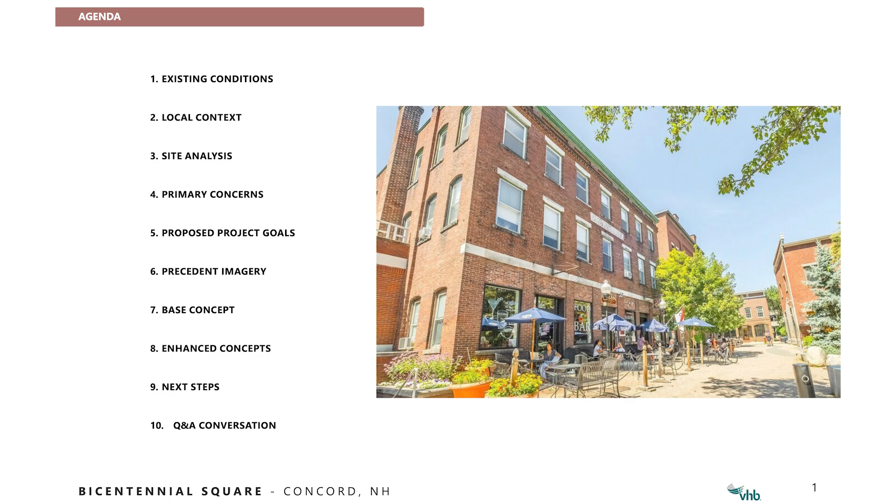We'll go over the 3 concepts we have speckled throughout the room. We have a base concept, which is more of our basic approach with more minimalistic impact to the square. Then we have the 2 enhanced design options off to the right here. Beth will follow up with next steps in this process, and we'll get into more Q&A comments.

So just a little bit about the history. Some of you may know a lot about this, but looking all the way back pre-1976, the square was primarily used for automobile use, not so much geared towards pedestrians, with service vehicles and so forth servicing the businesses all around the edges of the square.

Then come 1976, that's when the first original design came about, incorporating the fountain, the stairwell in the middle of the plaza, and some of the outcroppings. Then in 2006 there was another update to the design, where our artistic sculpture came into play, along with a lot of other different elements like rock formations, plantings, granite, the artistic granite turtle, and some other granite play tables.

So these are enhancements that have happened over a period of time, and it's something we want to recognize - that historical aspect, along with how the storytelling currently happens with this river trail path motif that cuts through the plaza. We want to take all these elements, recognize them, and see how they can be incorporated in the future. We'll get into that in a minute.

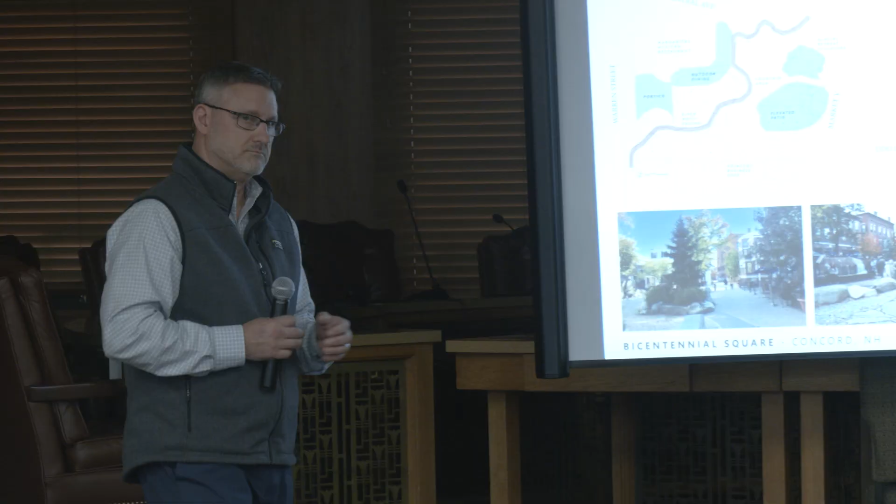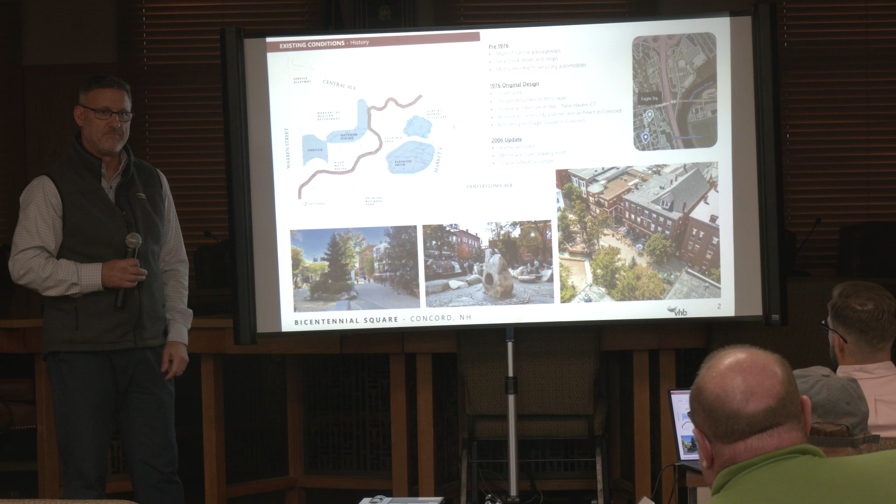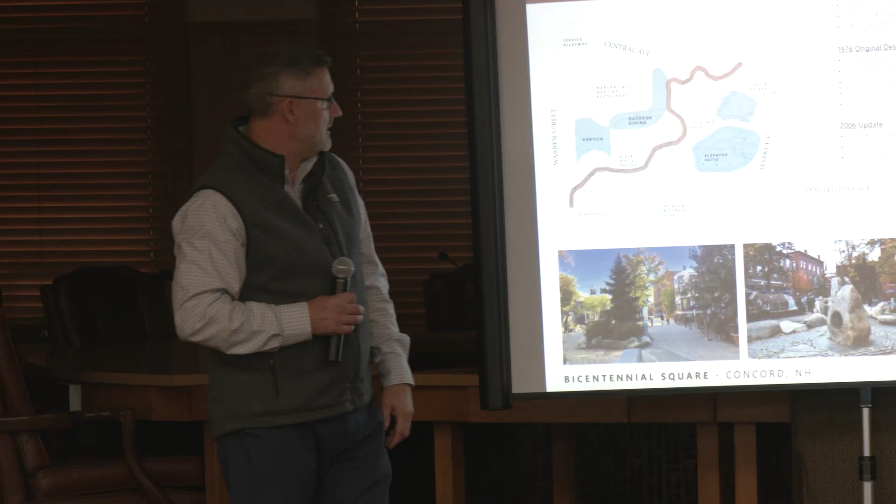And the shelter, what's the shelter removed? So the shelter removed - there used to be, back in the old design, a small shelter right here, and it was replaced with the artistic stone sculpture. There was a little steel shelter, a plastic shade covering over it in that location. Those have become important to understand why they're there and why they could potentially be moved, and how that functionality of the square would be impacted by shifting those things around in a positive fashion.

So we'll continue moving forward. As we look at the greater context, you see the square is sandwiched between Warren Street to the north, Pleasant Street to the south, and connected by Odd Fellow Ave, which is primarily a service road, although a lot of people use this as well for different uses. We have Central Ave to the east side of the square, and then Market Lane also to the south.

The interesting part of this is a lot of service vehicles come in and out of here, along with other vehicles. So one of the tricks here is we have a lot of pedestrians using the space and a lot of vehicles using the space. So how do we intertwine them together? We'll talk about that a little bit more.

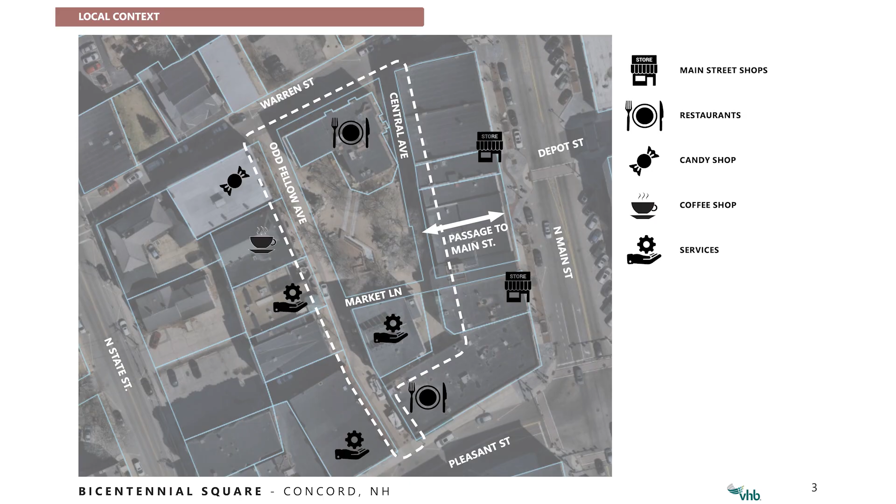We also have this really interesting connection, which is the pedestrian passage through the buildings - really interesting because it's our only connection to North Main Street, so that's really important. As much as it's a very small, closed entrance, it can be a little scary at nighttime, and even during the day it's a little shady and dark. How can we try and activate that and really make the connection, whether visually or physically, over to North Main Street? And then we have the businesses around, which add a whole different dynamic to the space, because they directly use the space. So how do you mix all the different uses for vehicles, pedestrians, and the businesses?

And again, just some of the circulation and site analysis. Vehicles in red, pedestrians in green. It's hard to see a little bit of the orange, but that's just pointing out the property lines to really understand kind of what we're dealing with.

We have the central square area in the center here, but then we have the public right-of-ways, as we talked about, where all the vehicles use the space and they straddle it. So you have vehicles coming in and around the entire pedestrian space, and how do we deal with that, which is a neat challenge.

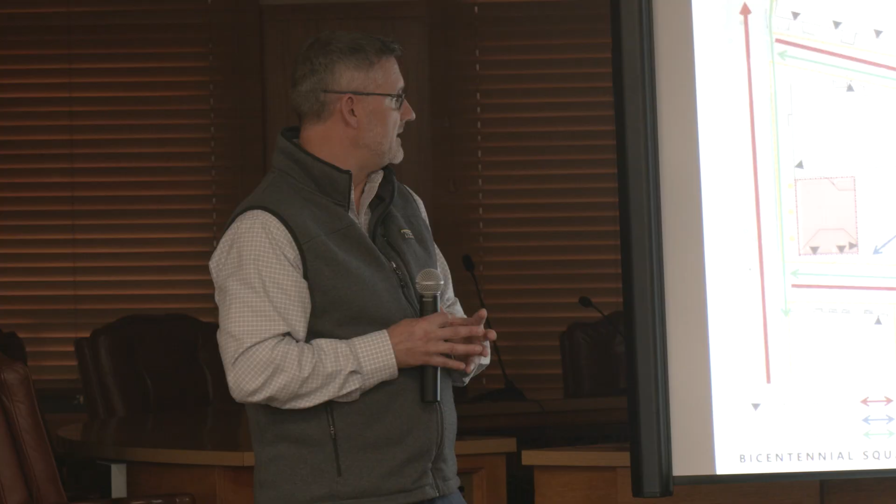And then we have all the entrances, in the black triangles, egresses from the different buildings, accessing into the plaza, just identifying those and how people move through the space.

And then we of course have a water feature. How do we handle that from a more base design approach or from a more enhanced design approach, which we'll talk about in the concepts.

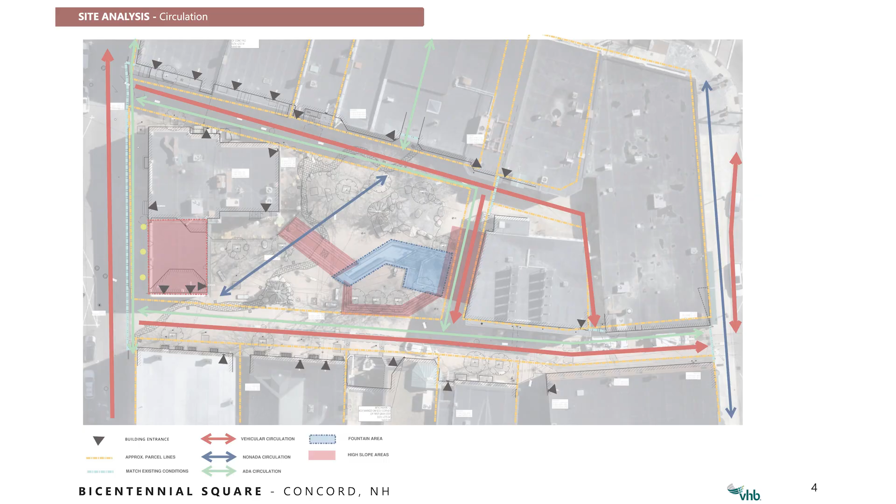The pink recognizes some of the steeper slopes and changing grade. That's one of the other challenges, that we have two terraces in the plaza. We're up high about 3 to 4 feet from here down to there. So currently, ADA accessibility doesn't exist within the park.

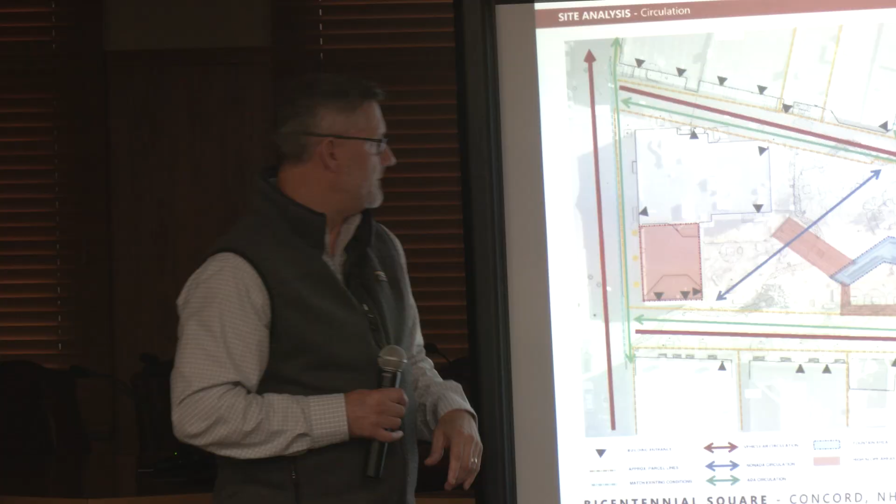The only way somebody can get around in wheelchairs is all the way down here through Market. And that's a relatively steep, uncomfortable slope, and it just forces people to go out of their way to transition down to the lower terrace.

And then we have different areas that people can't access. You have this little terrace here above the fountain where it's just all stairs. There's no ADA ramp allowing any user with a wheelchair to access that spot either. So that's something we're really looking at closely.

And the tree analysis, we looked at this closely as well. That was done by the New Hampshire Urban and Community Forestry Program. And what it comes down to is a lot of the trees are in rough shape for whatever reason.

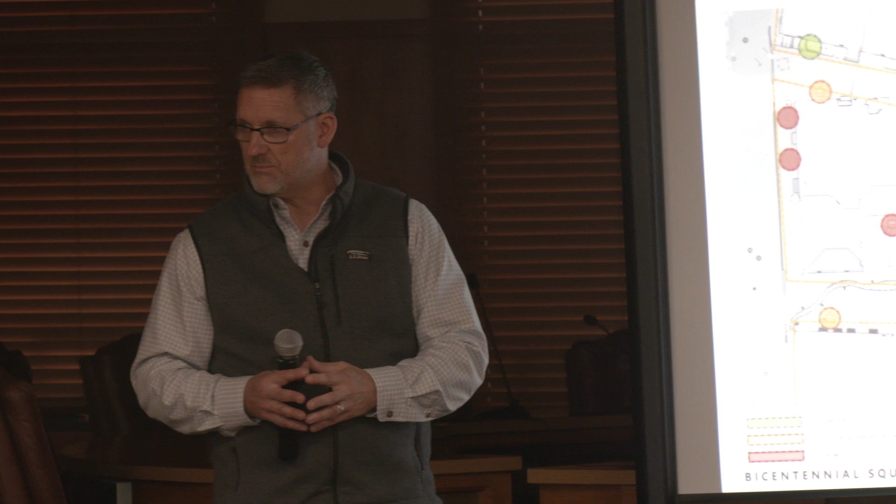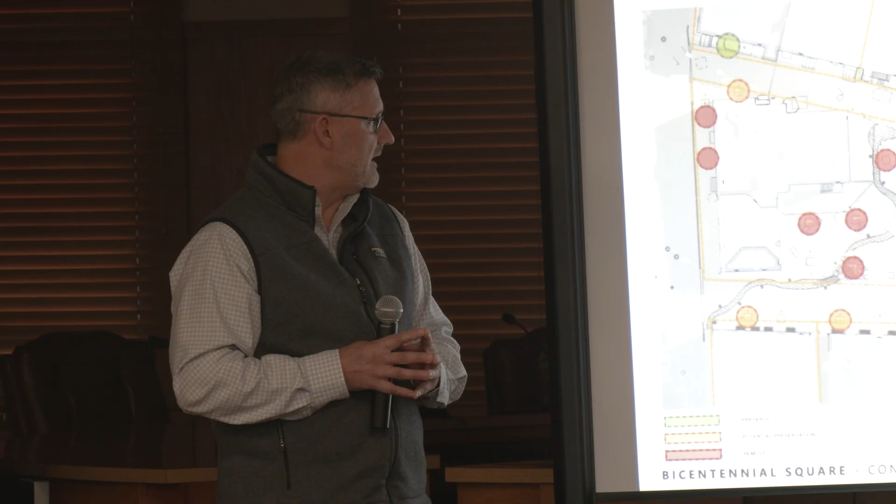We have Bradford pears here that are probably one of the worst trees. They fall apart very easily, branches break, they're very dangerous trees. A lot of trees have wounds, or they've been impacted via the paving, lifting or sinking, which creates a very unstable path to travel onto. We trip, and it's harder for ADA people as well to travel through the paving.

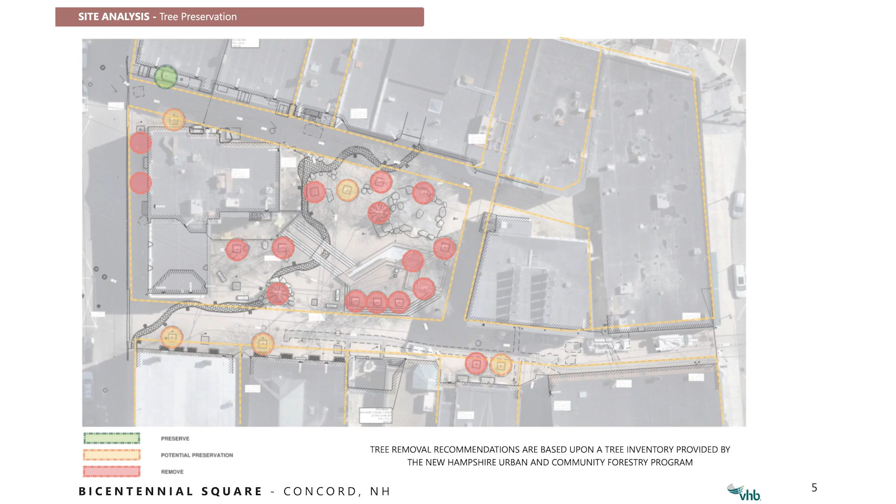Some of the trees obviously are really close to the buildings. The root systems can impact some of these older building foundations over time. So as much as we love trees and want to save as many as possible, they offer shade and so forth, but when we look at the long-term sustainable approach to the square, we want to make sure these things last for the next 40 years.

And so as much as we do like how big they are, some of these could certainly disappear over the next 10 years. And if we had to remove them at that point, it's going to create a real mess with the paving and everything else. So we'll get into the design in a minute.

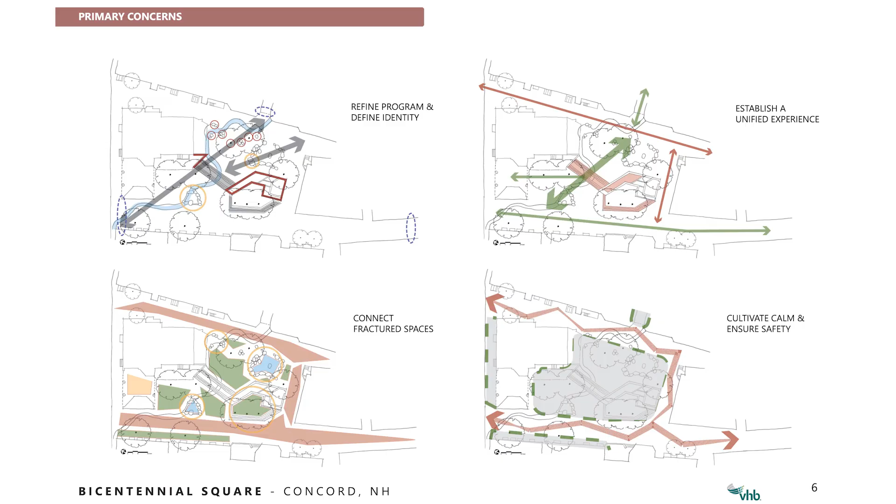So we just looked at primary concerns, or what we call opportunities and constraints, from defining the identity of the space, unifying the experience within the space, to how the overall square is fractured. There's different spaces and different movements, which makes it hard for people to identify and really be comfortable with the overall square, and then ensuring a calm and safe place to be.

And these are four things that we look at. We'll look at a little bit more detail and how they actually impact the space and how we want to respond. So when it comes to refining the program and defining identity, the square does have this particular appearance that we can identify with, but how can we look at the future and really create a square that we can all appreciate, by identifying the history,

by looking at the different activities that happen within the square, the festivals, and what other activities we can introduce into the square to really be inclusive and make this more vibrant. How can kids become a little bit more active? We know in the past the square has been used for different activities for children, but really looking at all the different seasons as well and how we can make it active and a lot more vibrant, bringing a stronger identity to it.

Bringing in timeless material, so we think, if we could jump forward 30, 40 years from now, how would the square feel and look then compared to what it does now?

You can see that it has this outdated appearance now, but if we utilize really nice material, whether it's granite, certain types of pavers, and elements throughout the square that will really carry this nice design theme for the next 30, 40 years, it can really make a nice impact.

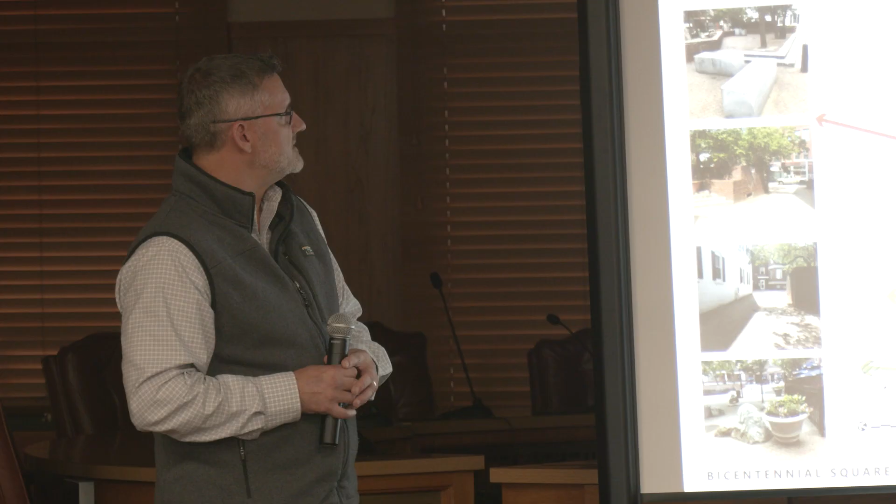And establishing a unified experience. Again, it's inclusive of all users, what makes a really positive and impactful urban space. So by enhancing circulation, dealing with the stairs here, how do we make sure that all users can be able to transition through the space effectively? De-emphasize service areas as much as it's very important to the overall space. How do we make it so it doesn't feel vehicle, it feels more pedestrian-like? So those things that you'll see, and we'll get into the design concepts and how we treat that.

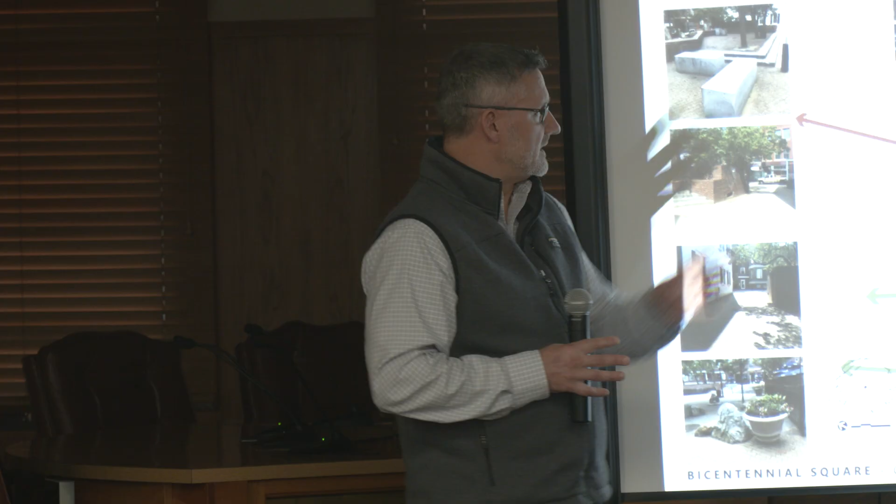We talk about site-wide accessibility, but also harmonizing access and programming. So we look at this, how does everything kind of flow together, from paving themes to where materials are located, how people get directed and circulated through the space will become really important. Again, we'll highlight those in some of the design concepts.

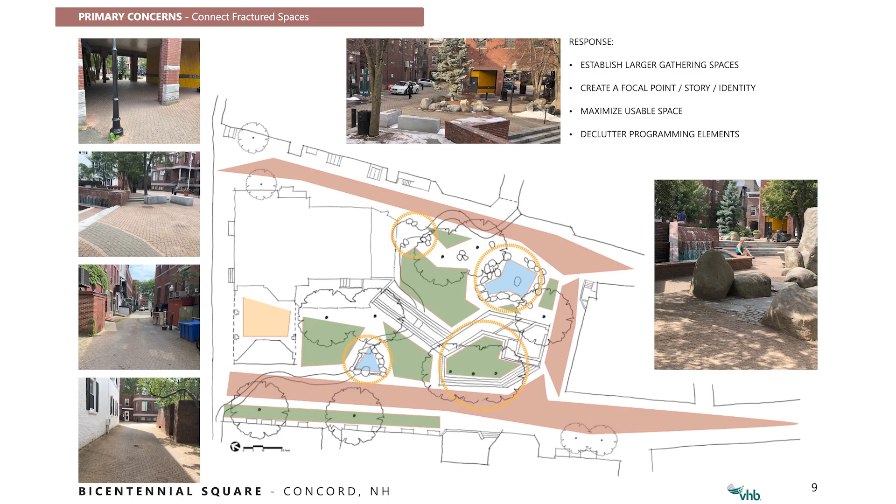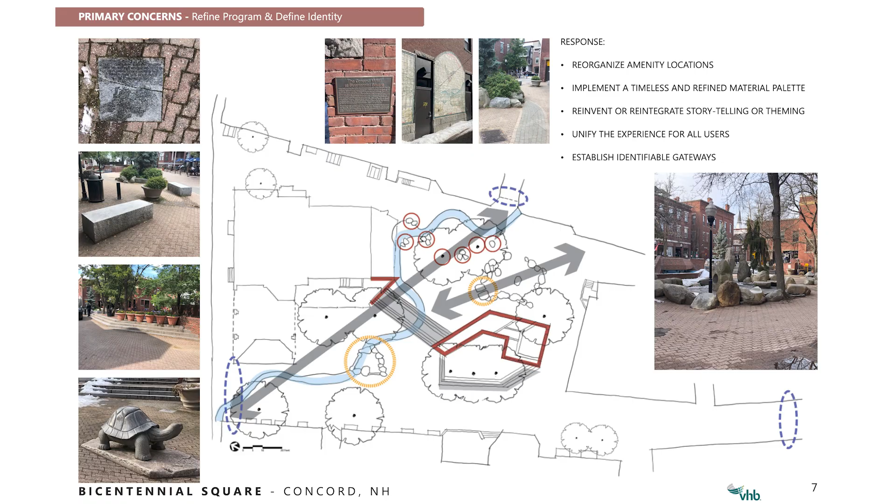And connecting fractured spaces, I mentioned that before. So right now, when you look at all these little green blobs, it's like you have these different little pockets, and then they're broken up by these rock formations. So there's really no open space for flexibility of use. Again, you have the different festivals, you have the different activities that are happening here, and they kind of get broken up by all these different vertical elements. You have the granite turtle, you have all these granite seat slabs in there, bollards, planters. There's just a really strong mix of all different elements, which really create this kind of fragmented and kind of confusing look to the overall space.

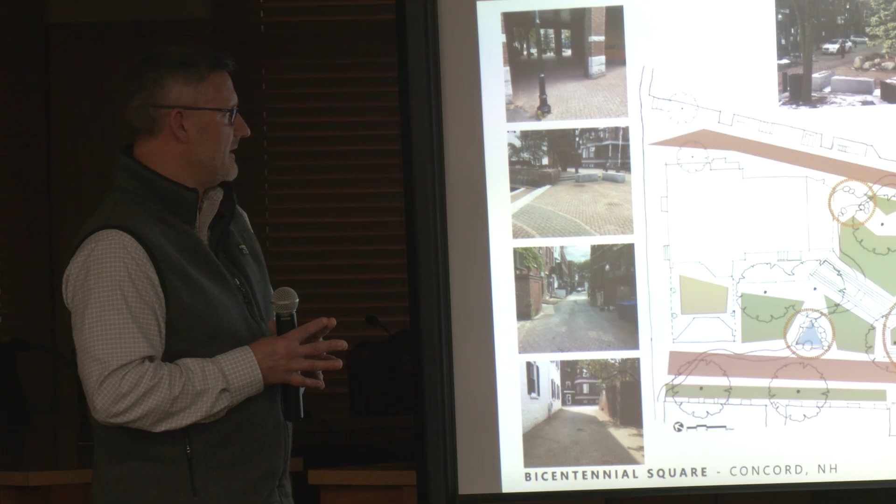There's no cohesive connection between all the different materials and elements that are in there. So you look at this right here, you have bollard, granite, brick, stone, lights. You have a lot of things going on in here. So we want to try and see how we can simplify that to unify the overall space.

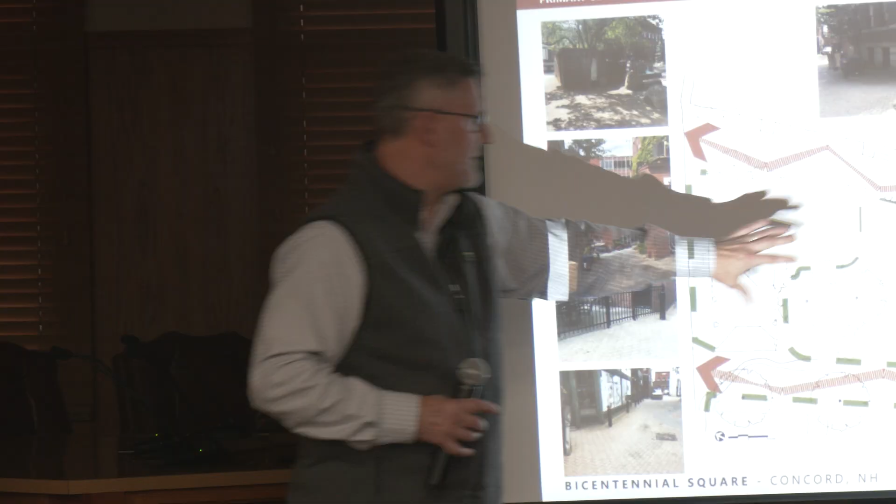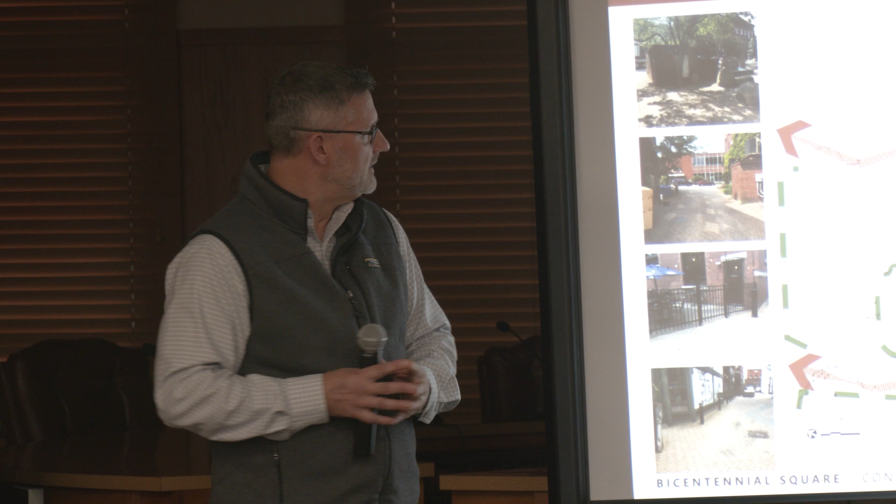And then comfort and safety. Of course, when we create an urban space like this, we want it to feel safe. We want people to feel like they're entering something that they can really appreciate. They're comfortable in the space. And so how do we do that? By obviously identifiable edges. Really, we talked about the circulation with vehicles, really identifying how that works and how it relates to the central core of the pedestrian space. And then by utilizing different paving schemes, and then effective lighting, of course, you'll see some impressive images that kind of define how we look at lighting. And also different security bollards help with creating safety for vehicles and pedestrians, keeping them separated and safe.

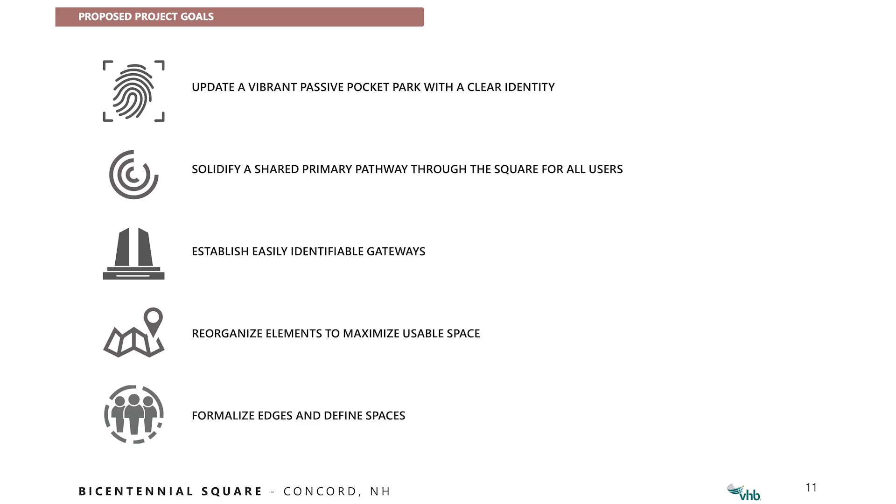And some of the project goals: creating a vibrant, passive park with a clear identity, shared primary pathway through the square for all users, establish easily identifiable gateways, reorganize elements to maximize usable space, and formalize edges and define spaces. We'll get into how the concepts respond to those goals.

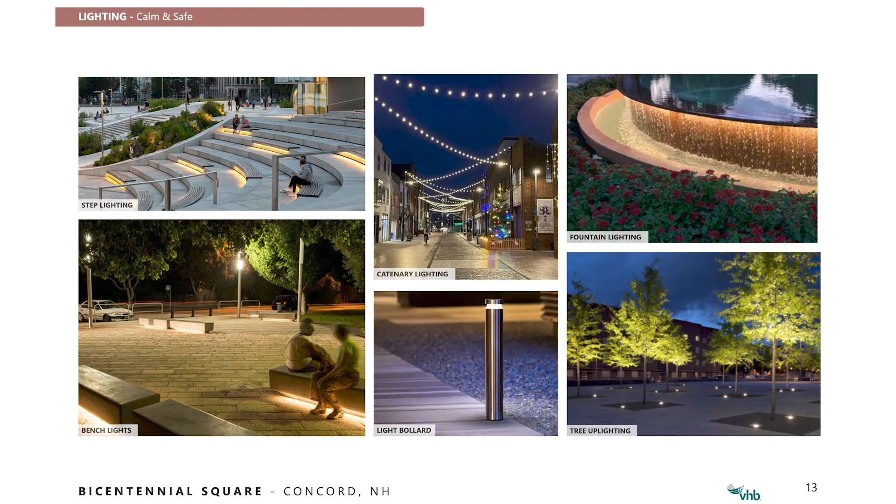It's hard for their eyes to adjust, so we're very cognizant of that. When you see the lighting down low, it glows at the base of the ground, and then you can do some nice accent lighting on trees, lighting them up while having the low lighting down below. It lights the ground, and then you add catenary lighting. As we all know, catenary lighting is almost magical. It draws you in. You see a lot of breweries that have them, a lot of residential homes have them too. I have them in my own backyard. I just love it. There's something about catenary lighting that creates a certain mood in a space. So in the designs, you'll see how we integrate them into the tree layout, and also into water features to enhance the mood of the space. We'll talk a little bit about getting that draw from North Main Street as well. And of course, security bollards can be used both for security and to add lighting, while also defining those vehicle corridors.

So again, we talked a little bit about timeless, refined, and cohesive design, and the different materials that initiate that thought. Some people use these types of slats, whether composite, wood, concrete, or granite. You'll see a lot of people using large slabs, whether concrete or granite, and then putting slats on top of them. The neat thing about that is they're extremely durable, but they also respond well to all different users. When you look at the square here, there's really not a lot of places for elderly folks to sit and relax, or anybody for that matter. You can go to the different cafes and sit at tables, but there's nothing really within the park itself. You can sit on a rock or a piece of granite, or on the turtle, but there's really not comfortable seating. So we want to look at materials that can sustain over a long period of time.

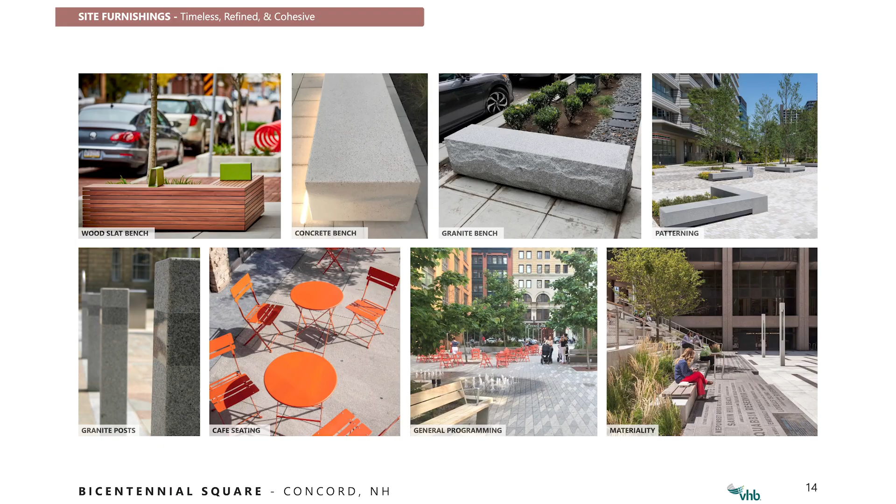Again, being able to have flexible seating. The base option offers that, where instead of controlled seating like these, you can introduce some flexible seating. You see this in New York, very famous in some of the parks, where they just put out all the metal chairs and everybody moves them around. It's extremely effective. Obviously some might get stolen, so there's some concern about that, but it is an option.

Yeah, sure. Relating to the seating, who owns the chairs and tables? In other words, Granite State Candy says their seating is only for their store, but BC doesn't say that for the ones in front of them. I'm a little confused whether it's all public seating anyone can use, or if it only belongs to certain stores.

Yeah, I don't know if Beth, you can answer that. I think they pay a permit from the city to have the seating there, and I think Brothers Cortado opens it up for public use, but they do pay for those. Same with Granite State. So they're given a permit from the city to have that seating out there, but it's their furniture.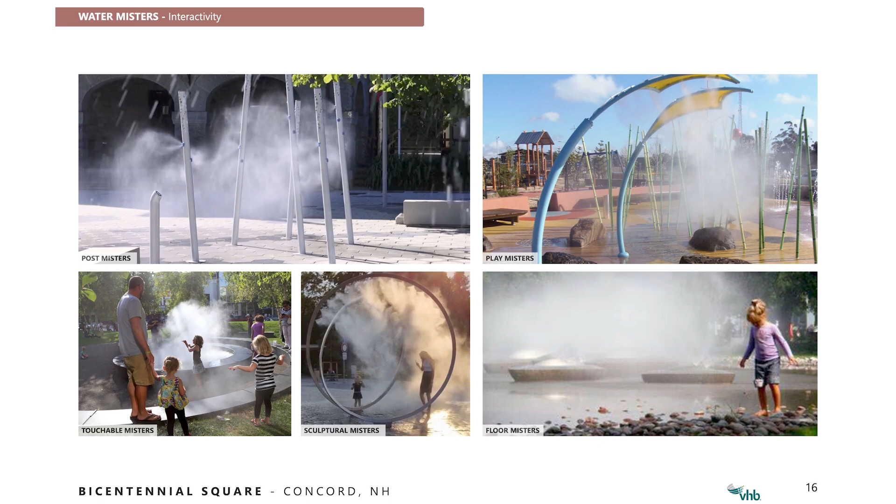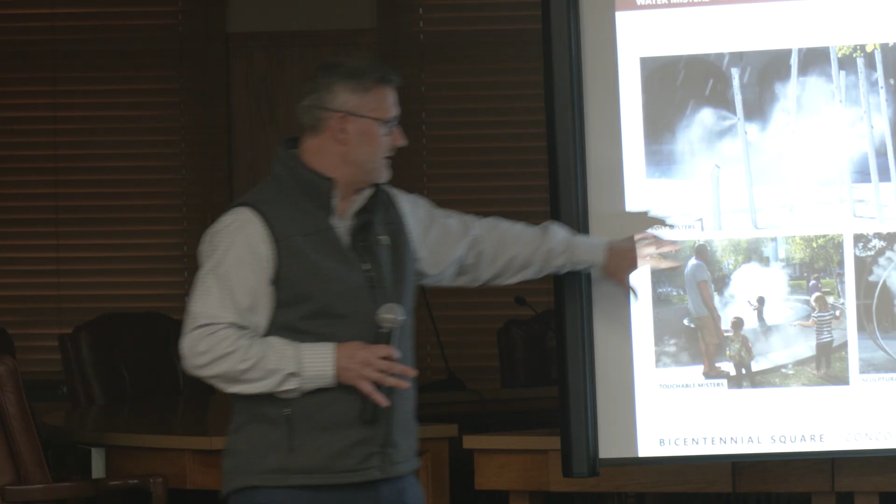Play features too - misters, we talked a lot about this, and how can we incorporate something that's fun for children but not getting involved with recycling water, the health concerns with recycling water and children getting into water and getting sick. This is a nice alternative where it can be a feature for children to walk through misting. You don't need all the recycling filtration systems for these things, but it's an option as a nice feature in the middle of the square, and you can do it more decoratively.

This is an interesting plaza here where they have these vertical steel sticks and they just shoot mist out of them. The kids play around them. So that's something else that can be potentially integrated in the middle of the square.

Another idea is different paving schemes. We'll look very closely at how trees can thrive here and how they can be planted effectively, whether tree grates are used, whether there's subsurface type of planting mediums. Permeable paving as well can be a nice option to handle stormwater throughout the whole square.

One of the issues I recognize is you have some of these really large scuppers or downspouts that leak right into the square, and you see water traveling across the square, so you have this slip and fall type of scenario that freezes and thaws the water as well. So how can we really remove water very quickly throughout the square very effectively?

Again, different playful seating can also be used, and again storytelling, whether it's through signage or incorporating into different elements that I mentioned before - the granite, the fountain, and so forth.

So as we get into the concepts, again I want to reiterate these are concepts, ideas, and we work with the city to take all these different ideas, our site analysis, and start to formulate some different ideas. This is where your input will be really, really important.

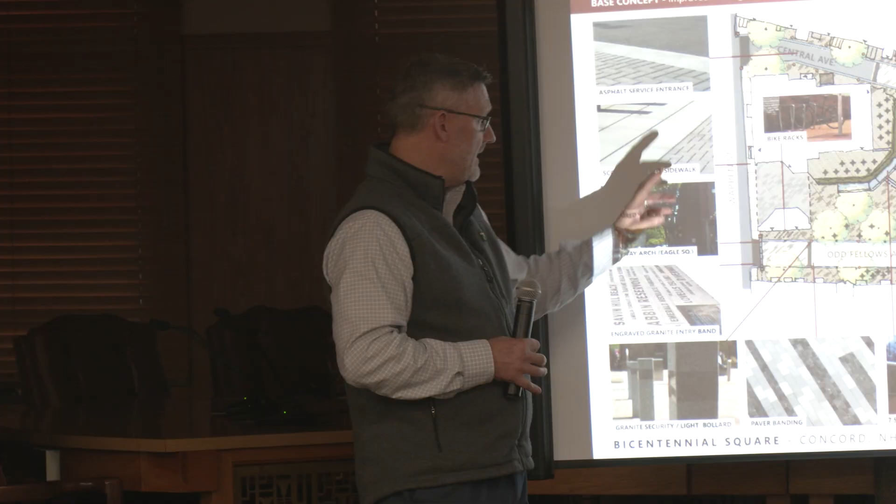That would also help with the differentiation between vehicle movement and pedestrian movement. You can see how the paving can change where vehicles move through the space, but then the central core has some other type of paving. Don't get caught up in the colors - it's just something we did graphically to represent a different paving color scheme here versus the central core.

But you can see different ideas of different paving schemes throughout the presented images. Some of the elements here would remain, which would be the water feature - it would stay the same, just get rehabbed over, so you get a facelift.

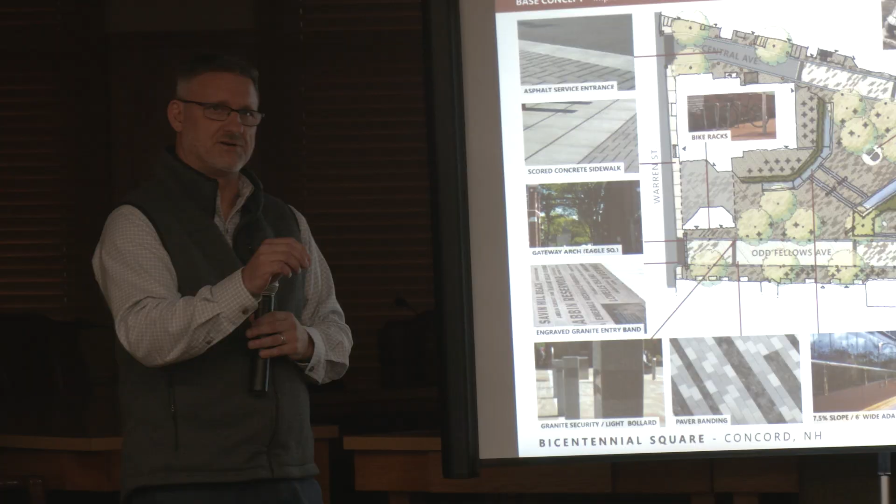So for instance, you have brick water falling over the spillover here, and this brick with mortar joints is not necessarily the best construction technique for a water feature, because the water eventually makes its way down into the joints of the brick and starts to break it apart, as has been happening over the decades.

The whole trough would get revamped, all the plumbing, electrical, and we introduce all new different materials, again, falling into that timeless appearance, whether we use granite or other materials to really give it a nice upgrade.

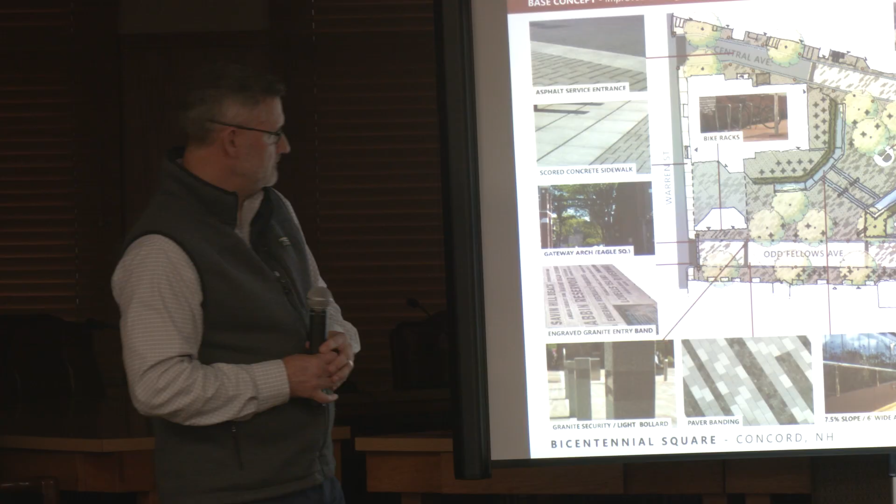Introducing all new trees, these bosque trees that line each edge of the plaza, defining the central space here, bringing in potentially some new trees along Odd Fellows. So when you look down Odd Fellows, you see a lot of trees going down. It just looks like a really nice corner, rather than more of a vehicle travel way.

The other key element here is introducing ADA accessibility. So we introduce this ramp structure here that fits and nestles right into the overall design, keeping the same patios at Margaritas. We just introduced this nice little green strip with the ADA ramp that works out perfectly, extending down from the upper terrace to the lower terrace.

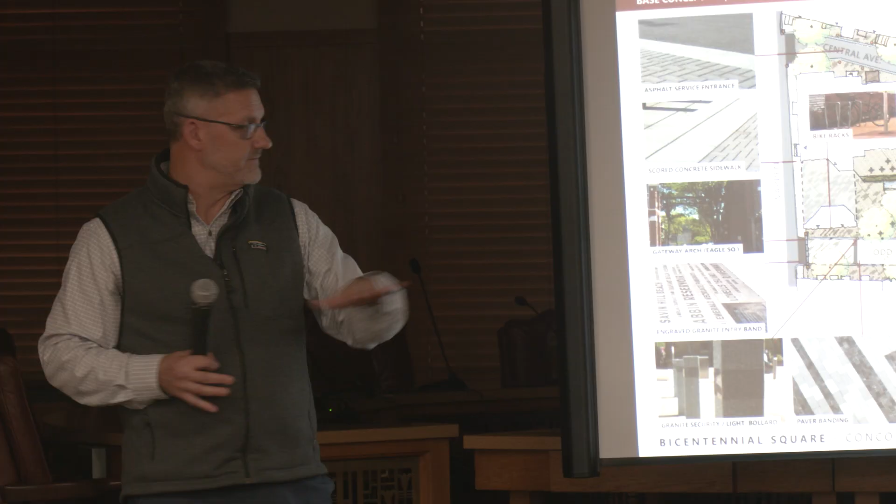This is where you see all the different seating that could be speckled throughout the plaza, a flexible open option. What's nice about this is the space can be used for a lot of different activities. People can congregate here for different things that go on in the city, people can meet here, there's plenty of open space, they can intermingle with all the different trees in here, bringing flexible seating, but it's very flexible and open.

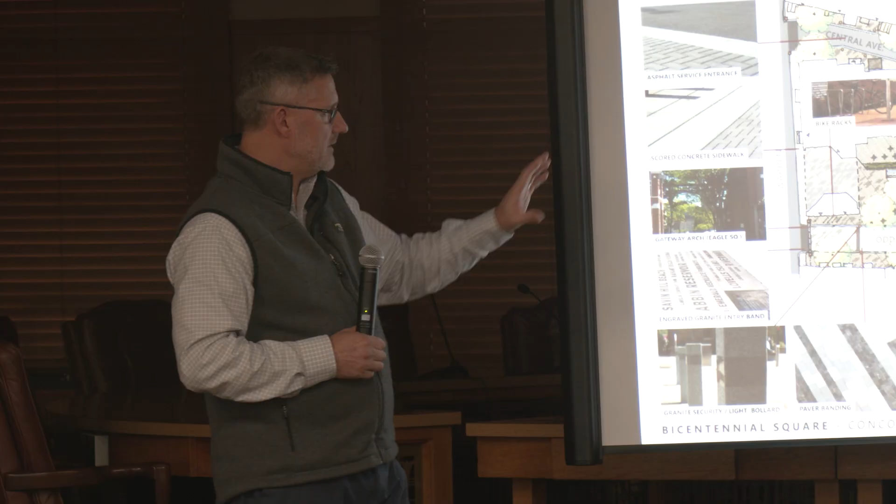And of course, introducing some plant material to soften the utility building that's in there, trying to soften that view a little bit. And then other treatments to define the service ways would be bollards and lighting to increase that safety for pedestrians, the different outdoor cafe sitting areas. And again, catenary lighting can be introduced in any one of these designs, whether it's intertwined with the trees, and create a really nice mood setting in the house.

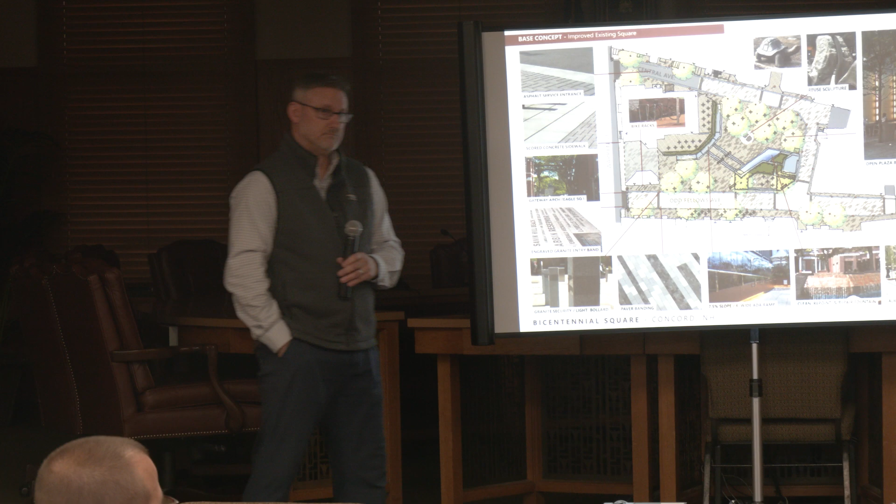Question. Yeah, oh yeah, you could. As long as I've been here, the two areas that I don't quite represent, Central Avenue and Oddfellows Avenue. So if you could point out, and maybe futuristically, put a few landmarks on the outside of that, like Brothers Cortado Coffee, Margaritas, just a shadow of where it is.

Is Oddfellows and Central, is that really the paved walkway that is periodically used by service vehicles? Oddfellows is, I would call it the main road through the square, the most direct route between Pleasant and Warren. It's the one-way street that goes from where Granite State Candy is in front of Brothers Cortado and then exits on Pleasant Street.

So the fountain, if you walk down Oddfellows, the fountain would be on your left. Central Ave is almost the alley between the back of what used to be the camera store and Margarita's. There's a dumpster back there, and then the other one is the Market Lane, over by the utility transformer.

The school street garage is to the left of Warren Street. Yeah, it's on the other side of Warren Street. But I'm still having a hard time putting this in geographical perspective, so not this evening, but futuristically, I think it would help a lot of people.

If it helps you, Brothers Cortado's right here, Granite State Candy's right here. And for the purposes of tonight, the south side would be the higher part of the plaza, and the north side would be the lower elevation part of the plaza. And this is that alleyway right here that extends down to North Main Street.

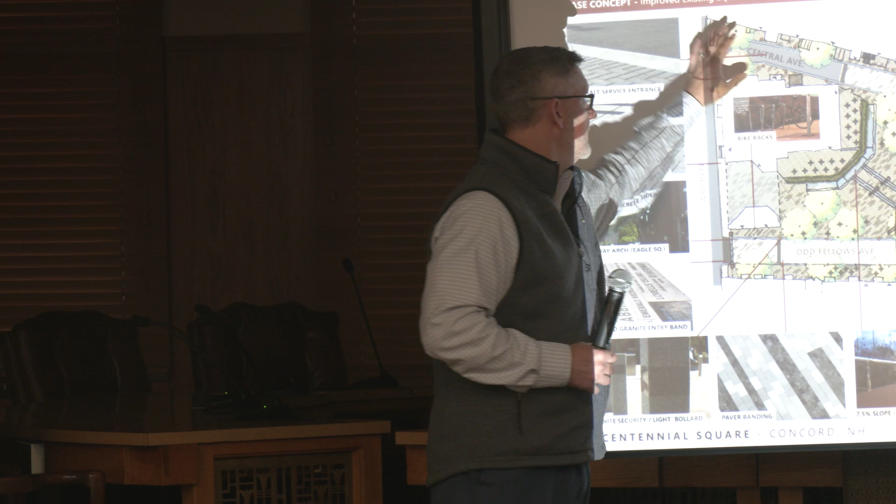So that's why we really stressed doing some type of gateway entrances at the Warren Street entrance, at Oddfellows, and then also at Pleasant Street, really de-emphasizing this as much as we can. That's why you see gray paving here, whereas as you enter down here, it starts to get into the more ornate paving, announcing that you're arriving to this nice plaza area.

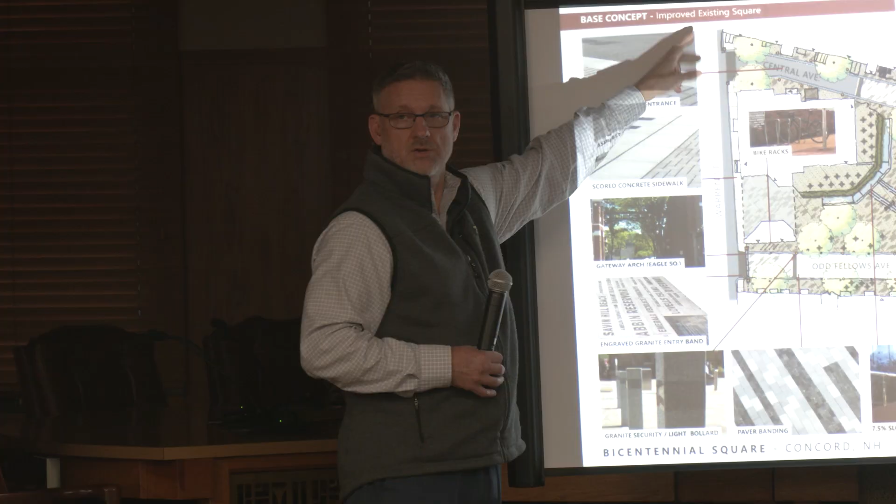So when people are walking here, someone new to the community will look down, and if it doesn't look too attractive or friendly, we want them to instead enter into the square here, or through the overhang at Margarita's into the plaza. Just to clarify, those are public roads and will remain public roads. We say service, but those businesses have parking available, so there will always be cars coming through there. We're trying to make it more obvious that cars should be there for those businesses, but we don't want it to be a cut through.

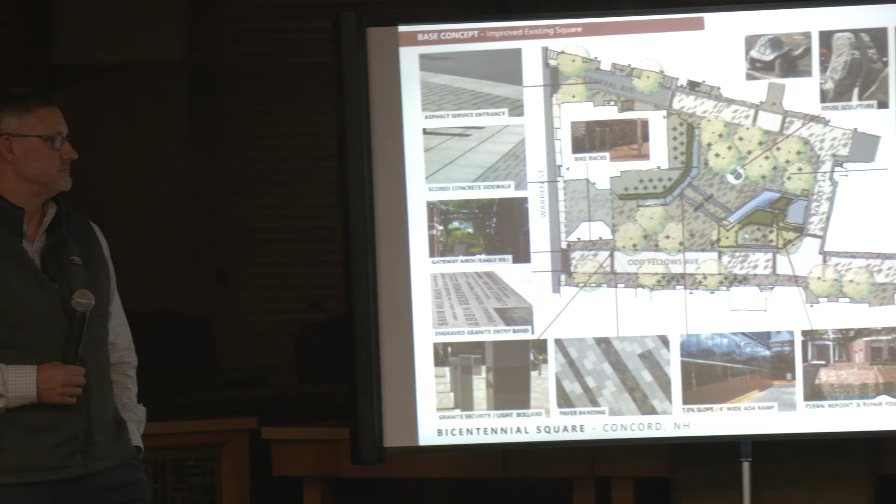It's a balance of not introducing too many cars that don't have to be there. We've seen issues, and saw it the other day, where people are coming in and just parking in the middle of the roadway. So we're trying to emphasize that, to get more information out there so people understand how the site is used, because we're not going to be discontinuing those as public roads.

Is there anything you can do about the dumpsters and stuff? That is really a rather nasty space there. Whose dumpsters are these? Margarita's, or solid waste? It's all of ours.

I'm at 6 Bicentennial Square. What I don't think people realize is that Oddfellows Ave is the only access to our building. There is no access from behind it. So I get that it seems like a walkway, and people ask why you're coming through here, why you have a dumpster. But it's our only access, and we don't want to take that away.

We just want to tell pedestrians that you may not want to go down this way, we'd rather see you go here. But the people that know they need to go there, it's not a problem — they can easily access it.

We talked a little bit about the really strong change in grade between the roadway and the sidewalk here — some people bottom out there. We'll do some improvements just to make it a little easier for vehicles to get through, but again, de-emphasizing vehicle use, maybe with some type of decorative paving at the entrances, and an overhead structure you drive or walk through, announcing that gateway.

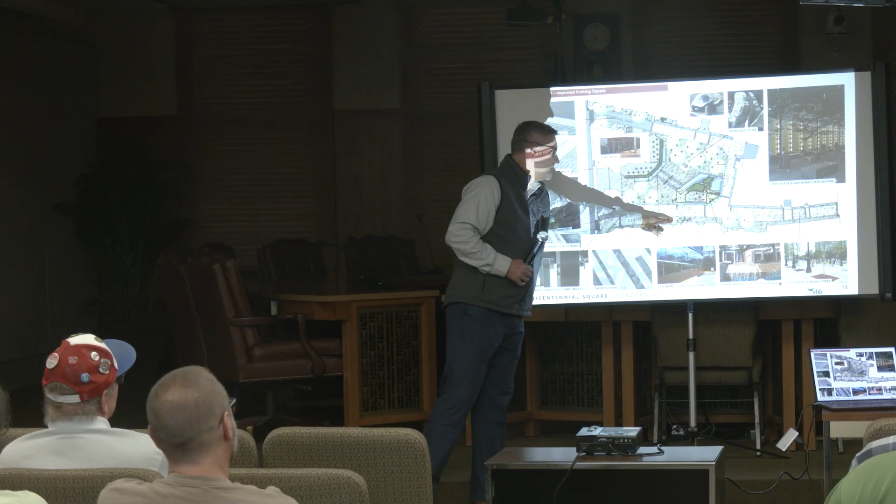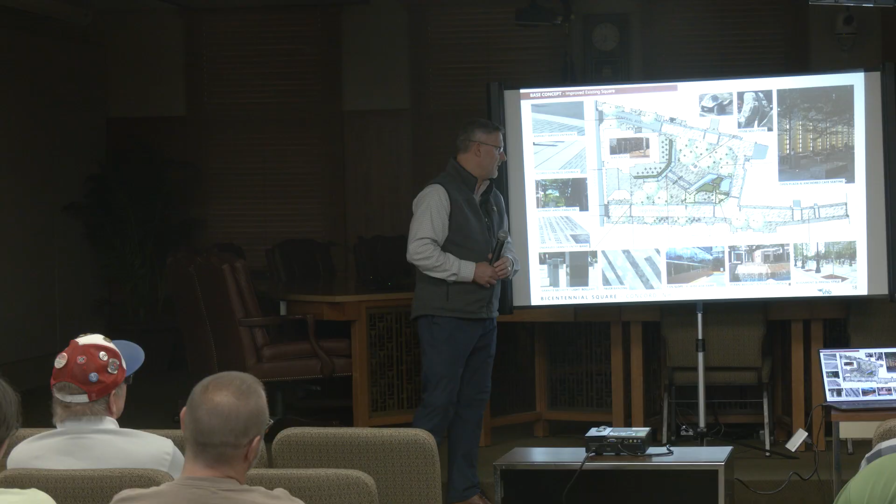But then vehicles can use it very easily. Lining the edges of it with bollards, light fixtures, or other elements will allow that level of safety — if you're sitting here, you hear all these crazy stories about people driving into storefronts, providing a little bit more safety than what's out there now. These bollards or other elements help protect people sitting in the cafe, give them assurance that they feel safe being in that space next to vehicles. They'll have that as well. But the idea in all these concepts is that it will feel very pedestrian-like.

And this is something we talked about in one of the enhanced concepts — it's called the European Plaza style. When you think about some of these well-known European plazas, they're just wide open. Vehicles can drive in and around, but they demarcate where vehicles can travel through with flush paving, whether it's granite curbing that's flush, so you can kind of see where cars go. But it's just a really wide open plaza, and people can go anywhere. But it feels very pedestrian.

Yes, so just adding one more comment to that — there are large trucks that go through there, deliveries to Benucci's, right? There's large trucks, ambulances, lots of vehicle traffic that happens in that area. If there's any kind of services that have to be done to those buildings, service vehicles go through there. I like people being in the park and feeling like the whole place is open to be in, but I think there's this perception that the car shouldn't be there — like you shouldn't be driving in here — when in fact, I like the idea of designating the roadway, that this is in fact a roadway. If you're a pedestrian walking in the roadway, that's great, but it is in fact a roadway.

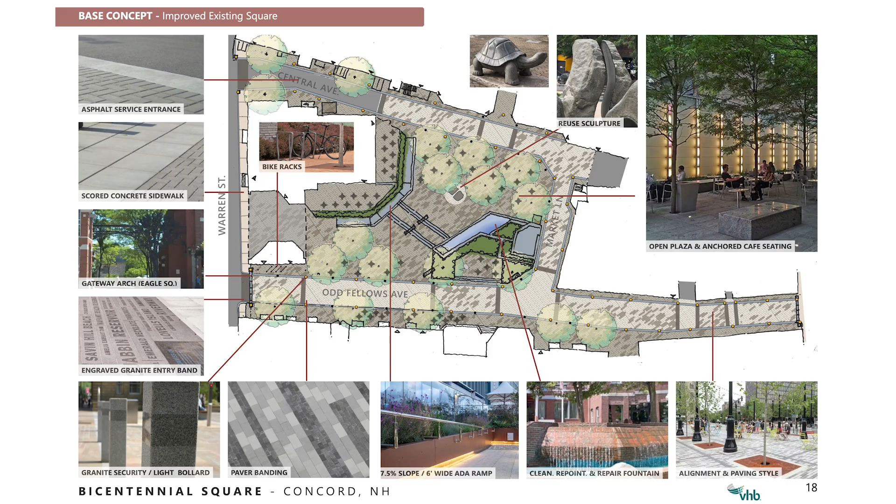There's actually an empty planter now. Yep, it was a tree that was removed because it was dead. I had to take it out. And they didn't put one back because I said please don't want to put one back there yet - it's gonna get too big and grow into the building again.

You mentioned planters, which is kind of interesting, because in some cases we work on a lot of plazas. We're actually looking at a plaza up in Skowhegan, Maine right now, where we're talking about using flexible, movable planters that are on rollers - you shift them and move them around. But the intent is you can't put a big huge tree in some of these things, you wouldn't be able to move them around. Still, that could be something interesting, where they demarcate the edge of the travel way but offer an aesthetic element that can be movable and flexible.

So again, as we move down the design process, these are different things we really focus in on: the details and the edges, and then obviously the whole square.

Can I ask a planning question? For you folks, after tonight, what's next? When will there be opportunity for more input? I was going to talk about that at the end, once he goes through all the concepts, 3 concepts. We'll wrap it up and talk about that.

Thank you. Okay, I'm going to shift on to the other 2 concepts, and then we're certainly open to questions. So this is what we call the European style plaza, where things start to really open up more.

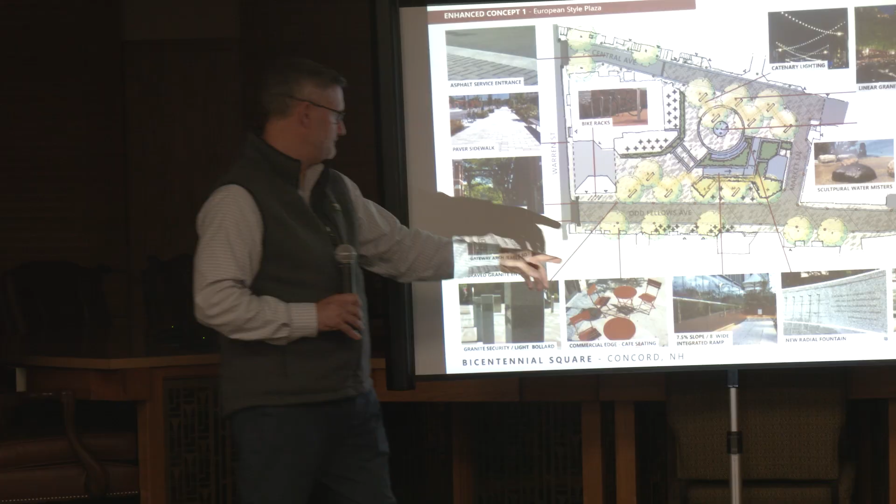If you can envision taking this granite wall here, and this curve being a curved wall of water trickling down the face of the granite into this stone trough, with some really interesting LED lighting that makes the wall glow. As you walk down North Main and peek down here, you'd see this really cool curved glow in the plaza and think, wow, what is that? It would start to spark some interest and potentially pull people through.

Of course, maybe lighting in that little alleyway needs to be looked at as well, to make it a bit more attractive and feel safer. But there are different things to really try and create these view sheds, these elements to attract your view.

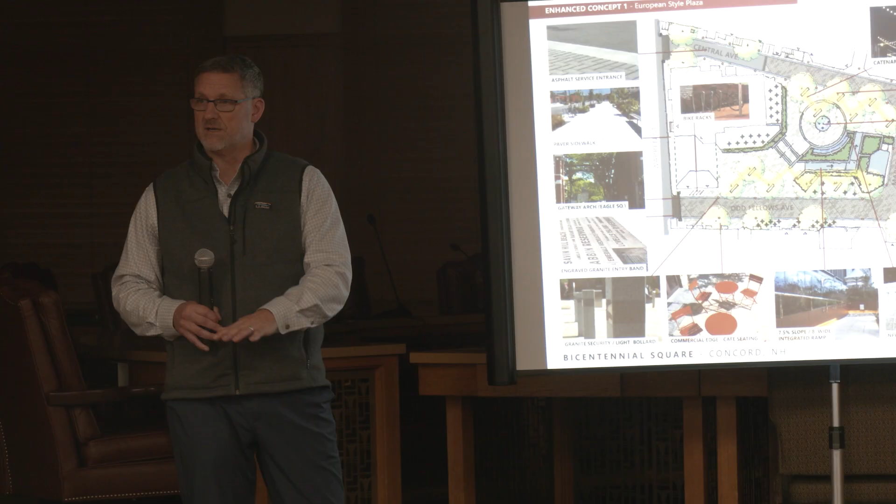Again, here, potentially introducing a central feature, whether it is misters or something down on the ground plane. We showed in the other concept a large piece of granite shaped like the state of New Hampshire, or something more relevant to the city itself, so we can do some storytelling about the history. We are getting away from the motif of this river thing happening, as it's not reading as well as the original design intent was.

So if we focus the storytelling on different features, or if you're sitting on these granite benches speckled next to the trees, there could be some really interesting things next to the granite or in the granite as you're sitting looking down. A lot of really neat elements to introduce storytelling and wayfinding and so forth.

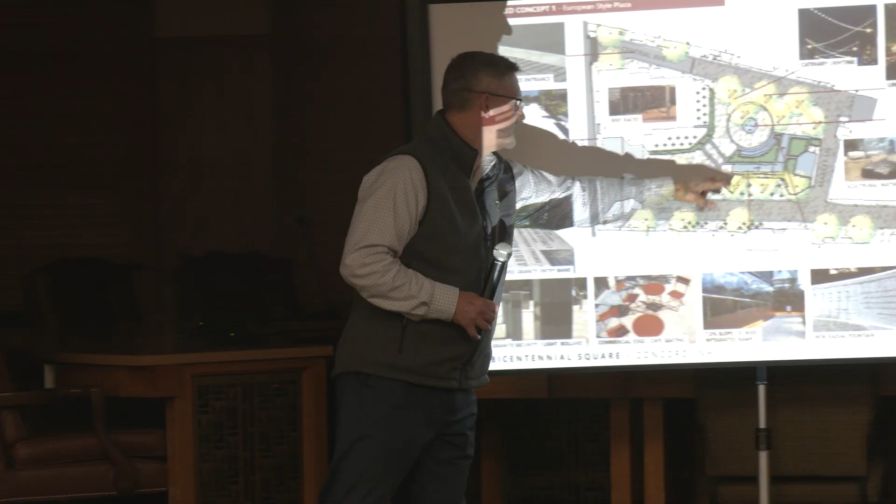Some of the plantings around here would help soften that brick utility structure. This option also opens up another little space here that would complement the cafe for additional seating. That could also be shifted. We can put the turtle in there, or the granite game table that people can use, so people aren't just stuck to this smaller strip here over at the coffee shop. So we're trying to open up some other spaces as well.

But now, for the arts festival and other activities, this becomes really open. You can fit all different tent structures here under the trees. We have catenary lighting that would be intermingled with all the trees as well, and really do some neat things with the paving design, kind of demarcating this really neat feature here.

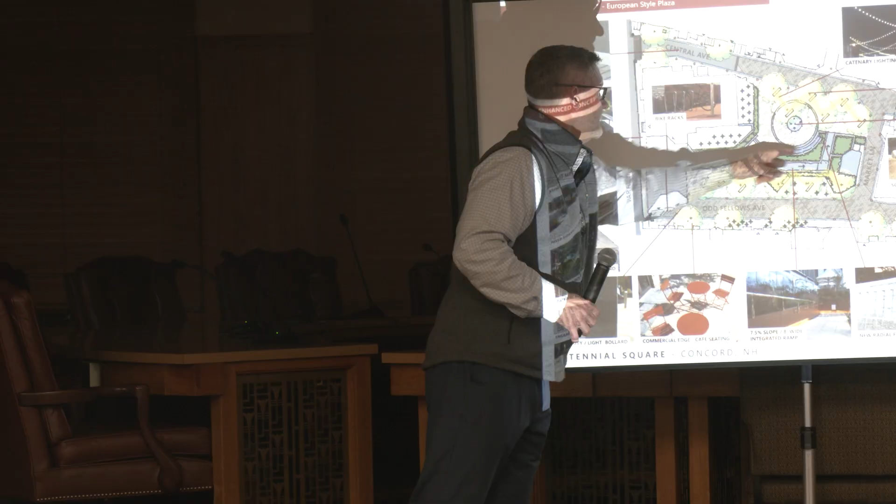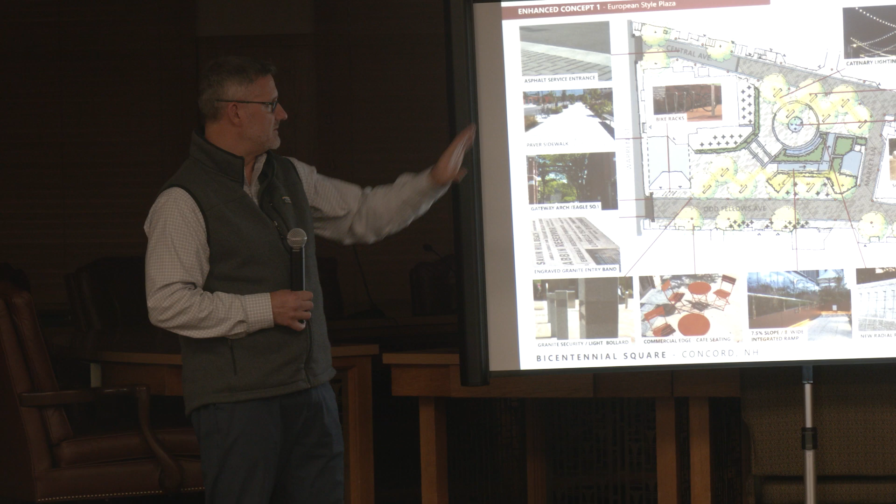We can do storytelling along the granite band here, so when people come into the square, they actually learn what's happening, they learn about the history of the square. So a lot of stuff can either happen in the water feature or down on the ground plane.

Again, the stairs would be improved, very comfortable, and the ADA ramp very comfortable as well. Same treatments with the Oddfellows and Central, just looking at different paving schemes and so forth. Again, nothing set in stone.

And then of course, lighting gets all integrated into this, and that's where we wouldn't see any light poles. You see 3 light poles right in front of Margarita's here, I'm not quite sure why, but our intention is not to put any light poles in here whatsoever. So we would look at integrating lighting in a very creative way, as you saw in some of those earlier images, whether it's down at the ground level, up in the trees, and other elements as well.

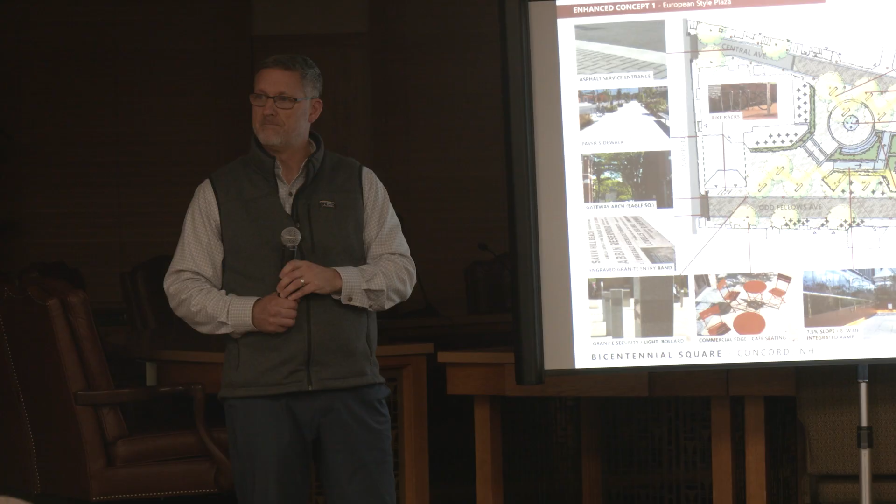How does the area underneath that overhang at Margarita's work, whose property is that? We're talking about Oddfellows Ave, but that's another way people come in and access the park, through that area. I'm not sure, does that belong to the park or is that part of the building owners? It's owned by the people that own the Margaritas building. We have a public access easement, so it's legal, but for a city we should look at city-owned property as our access way, though there is public access through there, through an easement. Thanks.

And again, creating some of the seating. So the balance here is, we create some cafe seating, but then we introduce potentially some slabs that you could put seat slats on, so it would be like a normal seat bench mounted on top of a piece of stone. Or they could be typical benches as well.

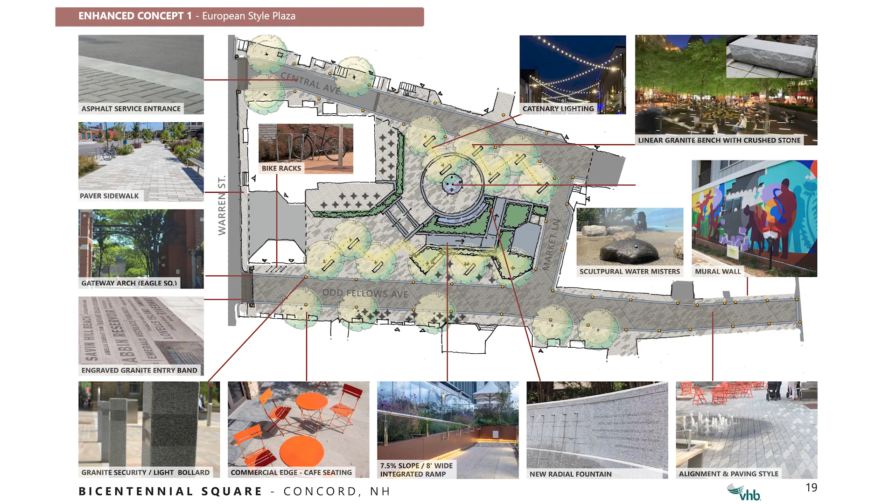But we kind of introduce this pattern that interrelates with the layout of the trees. And when you look back at some of those precedent images where we had the lighting at the base of the bench, it makes the ground glow. So when you're looking down on the plaza, it almost starts to look like this artistic formation of seating and trees lit at the ground level, and then the trees lit up with the canopies. So it has this really attractive, warm glow to the whole plaza, and you start to emphasize all the vertical elements, which gives it a really interesting mood and appearance.

Any questions, comments on this particular concept?

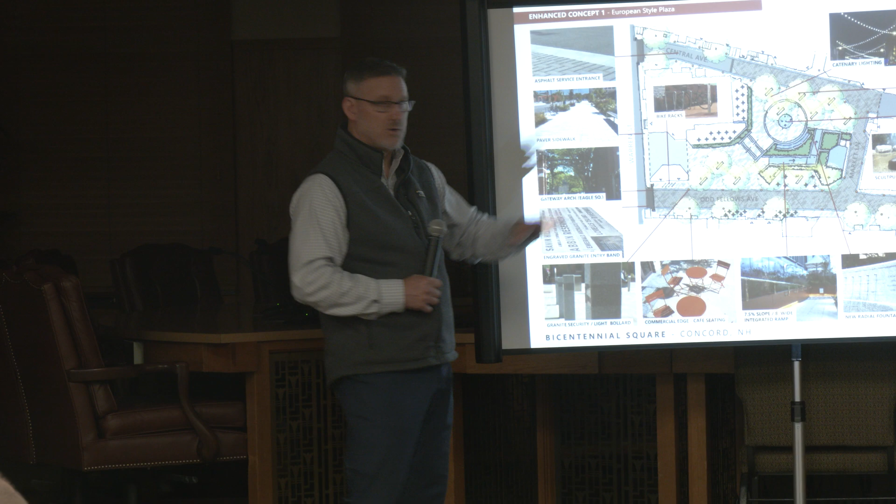My background's in facilities, and from a maintenance perspective, looking at all that uplighting, probably custom built LEDs, ground lights—over time, maintenance—is that a concern when you're talking about having materials that are going to be there for 40, 50 years?

Certainly it's something to discuss. These are all suggestions based on what we've seen in other plazas, and it's a decision that we as a team, with the city and folks like yourself, will make as we progress down the design process—what do we really want to incorporate. Then it comes down to funding, what we can actually afford to put in here. So if certain things have to be cut out, we look at other alternatives to supplement that. I absolutely agree with giving a maintenance overview of the different applications here. But the intent is to really simplify the design of the overall plaza, to get rid of elements that impact the whole use of the plaza.

But of course, trying to introduce some of these lighting LEDs is nice because they do last for a pretty long time. They're supposed to.

We can agree that they're supposed to. I agree, in the sense of uplighting on trees, you have to really think it through. Of the public spaces we see, both around Concord and around Manchester, the first thing to go is those ground lights, and generally speaking, they stay down. You're exactly right, because there are several in the square that are basically beyond repair. However, the ones on Main Street had some thought put into placement and maintenance, so consequently it's a little bit less of an issue.

In regards to the salt, what's nice nowadays is these unit pavers are 8,000 PSI, with integrated colors all the way through. So when you think about regular stamped concrete pavement, it starts to wear away, but these pavers are pretty darn durable. For instance, we did a large project down at Wesleyan University College in Connecticut, a big turnaround for massive buses at the athletic facility down there. The one thing they always tout is how this hasn't changed for the last 15 years. They get a ton of snow, a lot of activity, big buses, and it hasn't changed. We used a very particular detail there that helped with the drainage, and certain pavers that interlock appropriately, but the salt hasn't affected it. Nothing's affected those pavers, they're pretty durable. But again, something else we look at closely.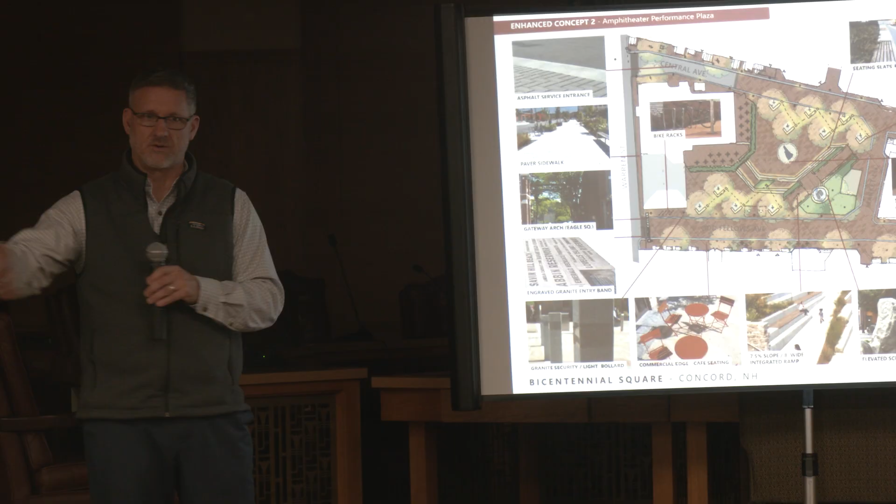You can incorporate creative benching, like here where you can do slats on the concrete, or if it's all granite, you do granite and put slats on top in very particular locations. Some people can sit on the granite, some can sit on the slats with a back, so for older people we can make it more inclusive. It creates this neat little amphitheater aspect of the design.

The other neat thing here is the ADA ramp. It doesn't necessarily feel like an ADA ramp, it's really wide, like 8 feet, so it just feels like part of the overall plaza, an access way down to the lower terrace. It would have railings since it's steeper than 5%, but it all gets integrated nicely.

You have this fountain here. When you come down, you come onto a large flat landing, an area where pedestrians can congregate and hang out in front of the fountain. This is something we pictured, kind of stones standing up, similar to a previous image where the water dipped over the edge with lighting underneath.

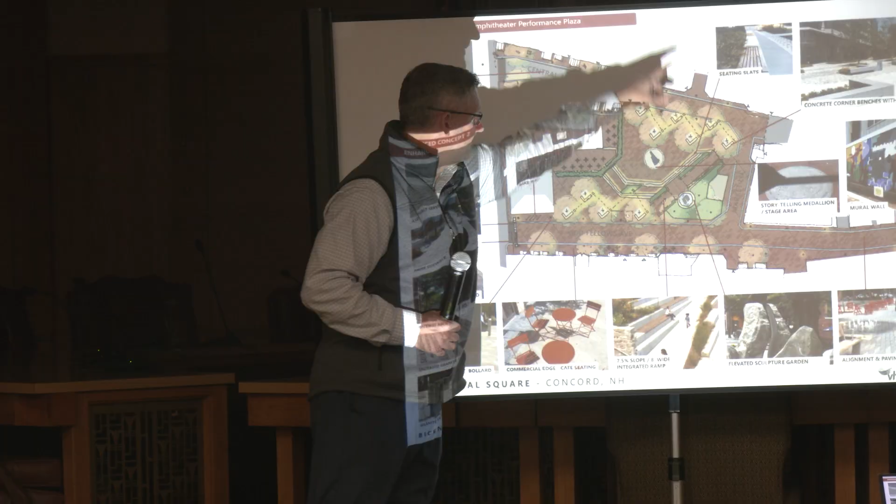We can put a rock formation in the center of this fountain with stone around it, maybe a bit of water above the stone. The reflection of the rocks can be really cool. We can bring lighting up through the water into the center, lighting up the rock. This aligns with the view from above, so lights and rock formations could draw the eye through. We could add lighting to all the treads as well.

We don't want to make this look like Hollywood. When I talk about lighting all over the place, it would be really dim, meeting lighting requirements, but with a nice soft glow, like in some of those pictures we showed.

So when I talk about all that lighting, everything would be very low level and comfortable.

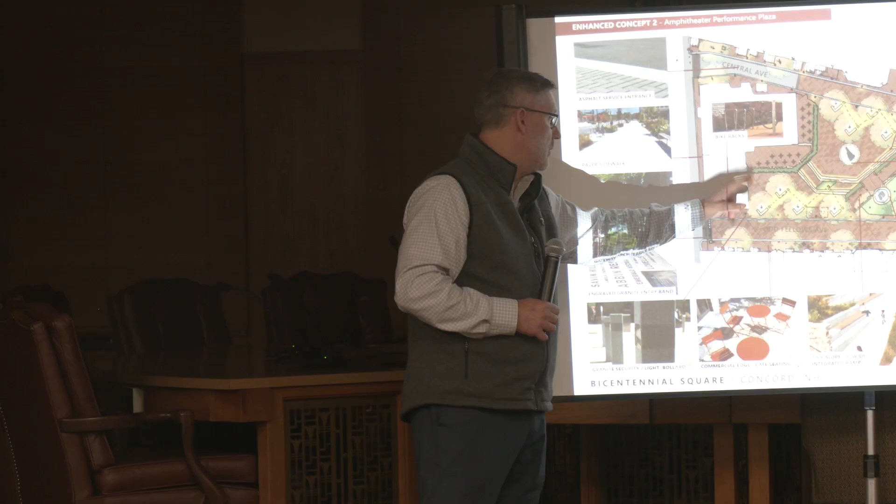Here we introduce these decorative poles—this is where your idea comes in. If we couldn't fit lighting somewhere else or it didn't fit the budget, we incorporated these posts to hang catenary lighting. If for some reason the catenary lighting came down, we could do lighting on top of these posts as infill, like theater lights coming off in different directions, creating a fun theater-type look. They could be more standard fixtures or light sticks, but we'd need them to also handle the catenary structurally.

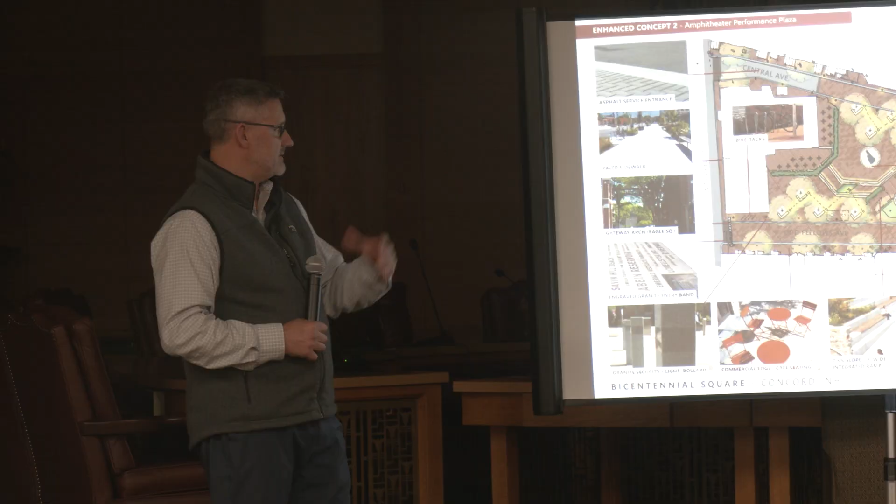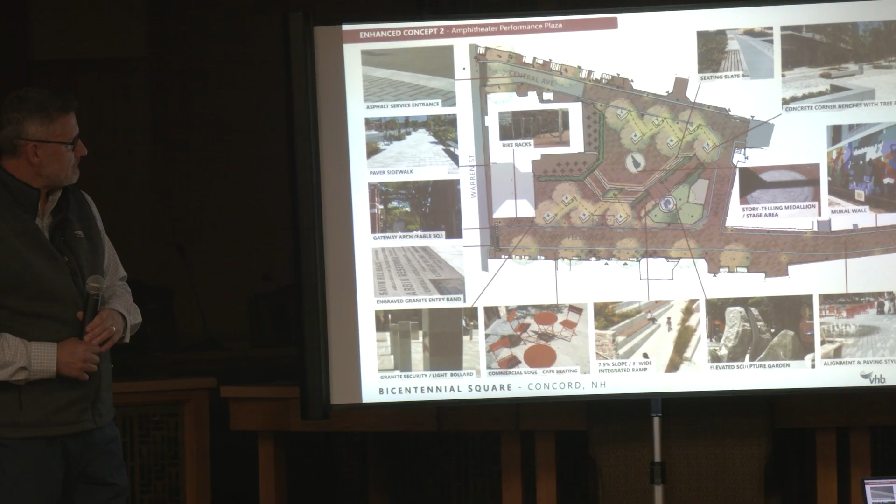All the trees are laid out in bosques, like in the other concepts we proposed. We like how they define the edges of the plaza and leave open the vehicle access routes to Oddfellows and Central Ave. We also have a centralized planting area here to soften the utility building.

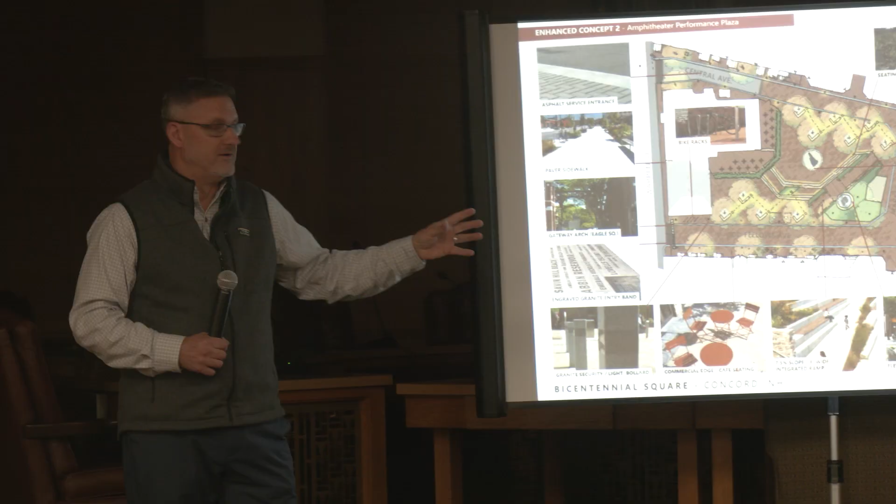Yeah, and then of course we switched up the paving color here. We know there's been some comments about not making this look very corporate looking. And so when you look at pictures like this, it kind of tends to look more corporate when you get into these lighter colored pavers.

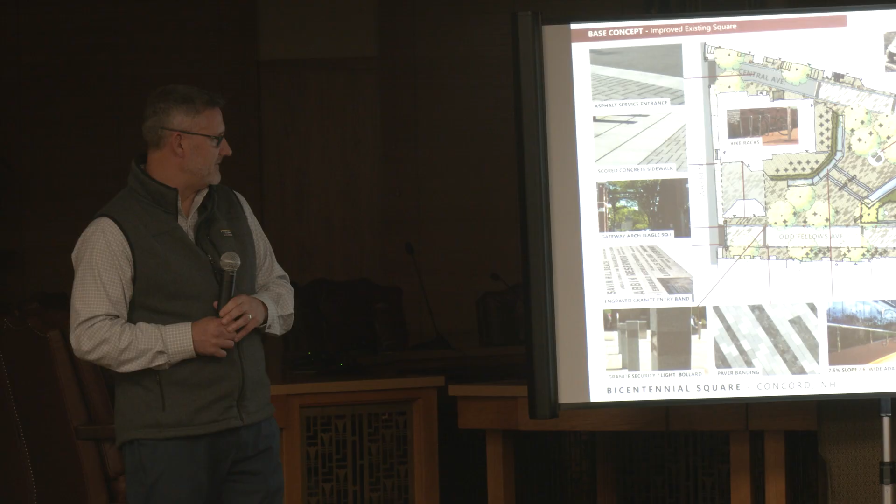So looking at the option of introducing a little bit darker color, if you could go back to that precedent with the brick paving, because it's really interesting and really fitting for a plaza like this. You can see how there's this mixture of the darker colored brick with lighter, and you can get really creative looking at the circulation going from Warren Street down through the plaza, down through the stairs, and through that pedestrian corridor to North Main.

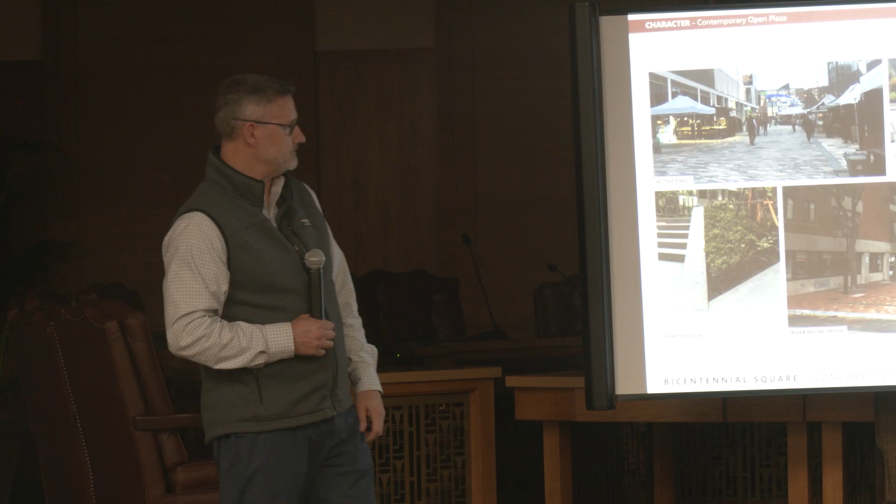You can get really creative and do these little speckled pavers throughout to suggest that circulation without creating this clear, demarcated path going down to the plaza. So if you can go back to that last concept. Anybody have any comments here? Questions?

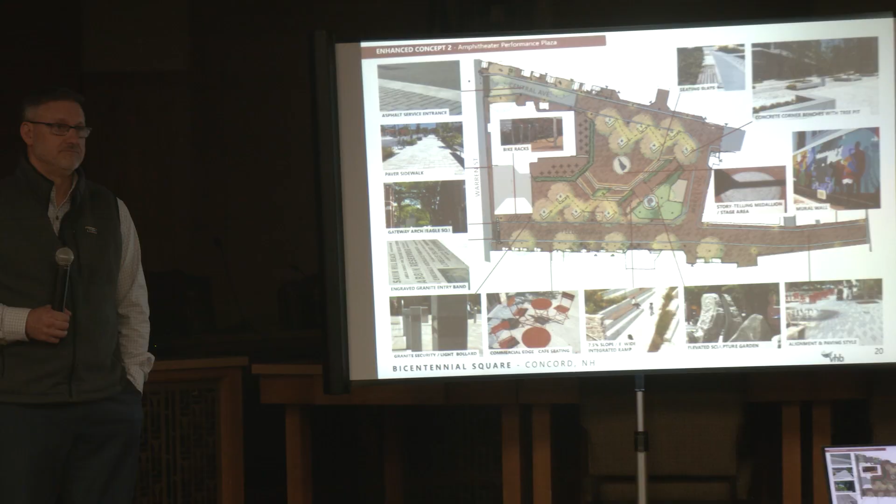Yes. I think of the three, this one's in my opinion the best. It feels like it's kind of the same character, similar, but it's just expanding the function of it. I really like it. Yeah, and out of all of them, this is the most open design.

We did play with the benches here again, these little L things. There's a high school down where I live that did this in a huge plaza. They spent hundreds of millions on their school, and they did these really neat L benches with flexi-pave around the trees, which is a permeable rubber paving that water can go down through. A lot of people do it on street applications around street trees. It's ADA accessible, but it's also flexible, you can actually cut it as the tree grows. And then they did the lighting around the base of the benches, and it has this really neat pattern when you look at it at nighttime.

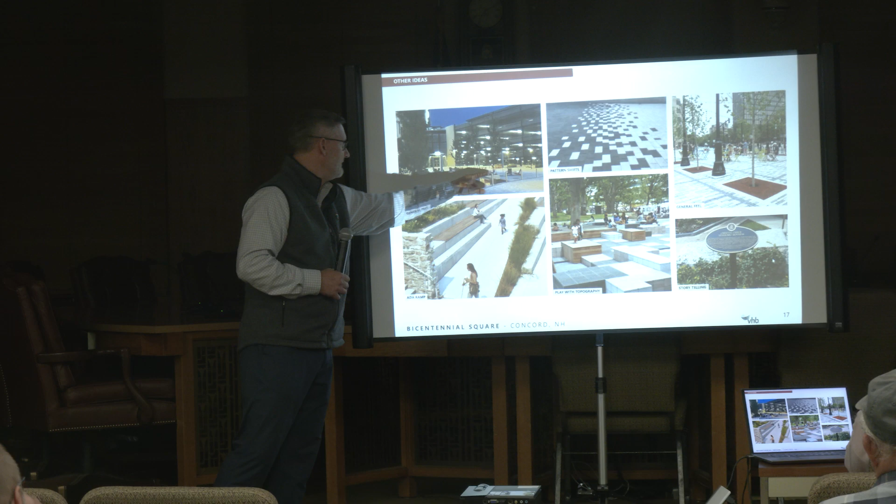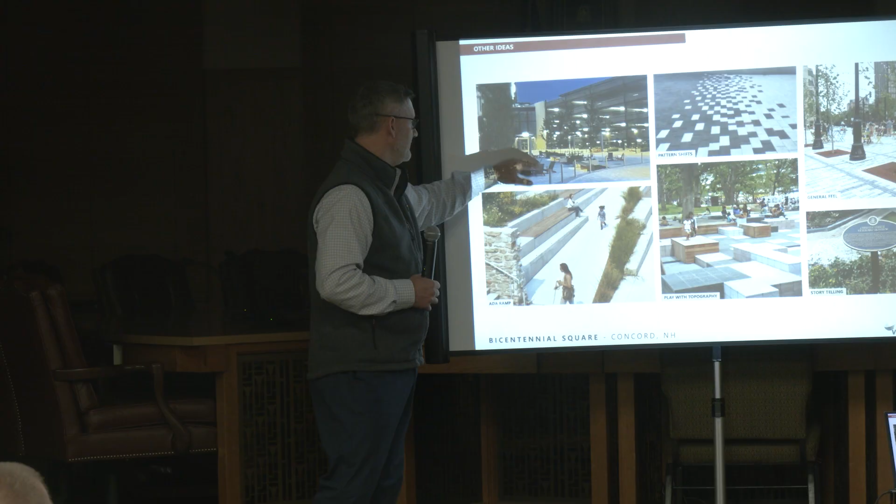This is a plaza we just did in Watertown, where we have these L type benches that we designed with the architects. I think this is actually crushed granite where the tree is, but we have this whole pattern of these creative L benches on each side of the plaza. You walk right through them.

But yeah, so this offers the most flexibility, adding like tent structures during festivals. There's a lot of space to be able to do that. It has all the same design applications we talked about along the different vehicle corridors, and again different options for bringing in storytelling, whether it's on the paving plane or vertical elements in the fountain. There could be a lot happening with the stairs as well, you can start engraving stuff in the stairs, and benches too.

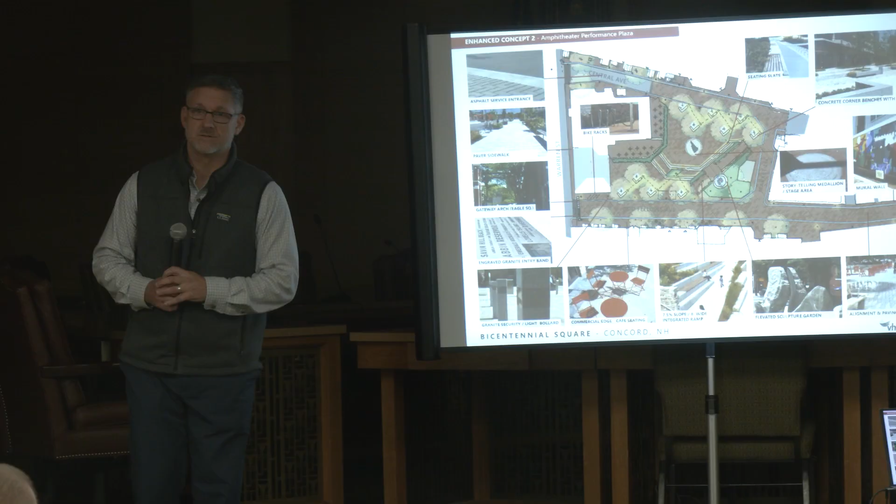Yes, and all this would retain the existing granite sculptures and the turtle, all those pieces are still going to be incorporated. You can't see them in the rendering, some of them, because there are so many it starts to create confusion. But we can certainly integrate them differently, like putting the turtle in the landscape as a visual element, or we have plenty of room to situate those elements for play for kids.

So I think that's also important, when we talk about inclusivity, it's not only ADA accessibility, elderly, young, teens, whatever it might be, it's all about children too, in the sense of attracting them, and that's why we brought in that little mist feature as well.

Yeah, just from my perspective, I would personally, the mist, I don't know for sure. I just feel like it's a downtown park, so I wouldn't want my kids to get wet because we're going out to lunch or whatever we're doing. I feel like if we're having another splash pad or mist, I want it in more like Rollins or Keach.

But I do really like the incorporation at present of the rocks. The kids locally call it the Rock Park. So I feel like maintaining that identity would be a good thing. I think that's what most of the kids I know call it, the Rock Park, and they love climbing on the structures and that big granite split. I know it's a huge thing, but that's like an Instagram moment.

When people visit me from out of town, that's the picture they love. So I wouldn't want to lose that either. I would recommend keeping that in future planning in some portion—it doesn't have to be the main central feature. I understand how that whole living room rock sculpture, my kids love it, all the kids I know love it, but I see how it's not necessarily functional from the ADA perspective or for best use of the space. But keeping that in spirit in the future renderings would be a good thing.

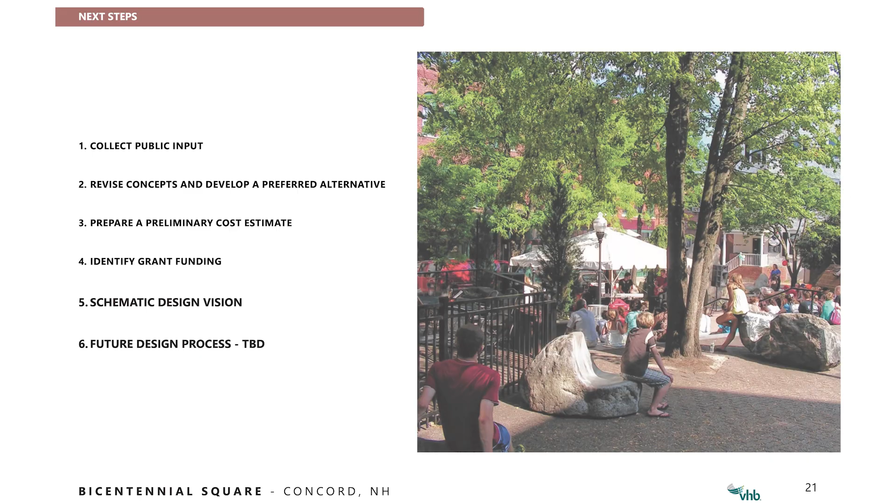Are we ready to apply for a grant? There's Land and Water Conservation Fund available - that's what originally paid for this park. So there's usually higher priority for existing LWCF properties to get funding in the next round, and that opens up in June of next year. So if city council okays it, we'll move forward with applying for the grant with the preferred alternative. It's still conceptual, but once we receive that funding, we can move forward with the next stages of design development where we actually engineer it and make sure everything works. All these designs are great, they're schematic, but do they actually work once you get into the deep engineering?

That'll be, fingers crossed, a year plus from now if we got that funding, and we would go from there. Again, we'd open it up for public process as we move through it, to continue conversations with the abutters and make sure we have the phasing correctly and address all their concerns. One of the bonuses of having Jay involved in the process right now is he's looking at everything from a maintenance lens, so great points about the maintenance. He is not shy about saying 'I don't want to take care of that,' so we want to make sure Jay is happy because then he'll take care of it.

This is a great, generational opportunity. The last time this was done was in 1976. So here we are, revisiting this site. It's a great, well-loved site - a little urban oasis that we have in Concord, which is fantastic. It's one of the first places I went when I was thinking about moving to Concord. So this is our opportunity to think about what we want to see it look like into the future. Some things are at the end of their life, so we have to fix them anyways - what do we want to do into the future? So 50 years from now, people are doing this again and thinking, hey, this group got together - why did they make these decisions? We want to make the best decisions for Concord now.